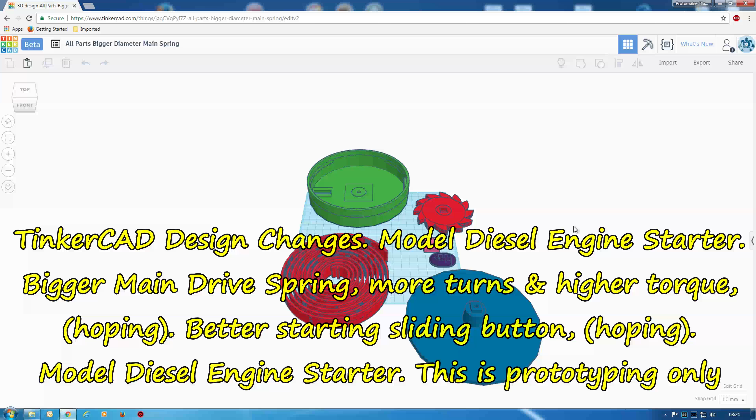Here I am in TinkerCAD. Let me move that out the way by clicking on there. And you'll see there's quite a few changes. One of the changes is to make this a bigger diameter. Actually, let me get this back. If I get that back, I can put the ruler on here. Sometimes having the ruler on is a bit of a nuisance because you have all these numbers popping all over.

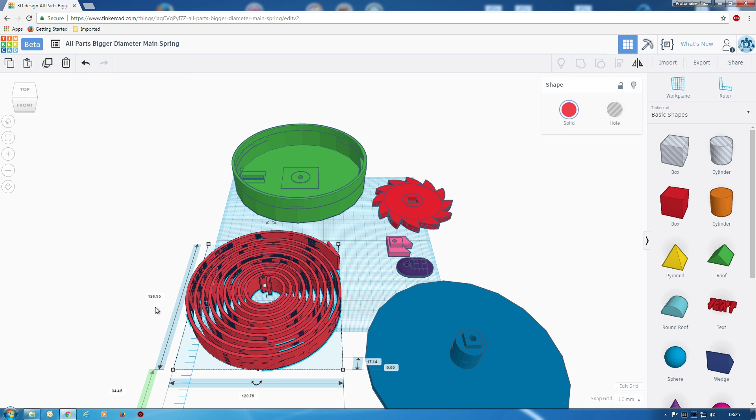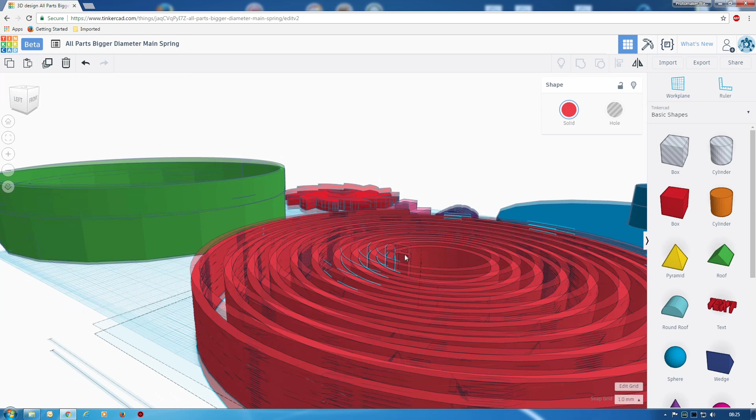But you can see that's, well, we call it 125. It is bigger one way than the other because it is a spiral. So I also made the height a bit higher, 17 millimeters. That's one of the changes. So by making the spring a bigger diameter, it was probably about half of this before, but by making it bigger diameter, I'm hoping for more turns.

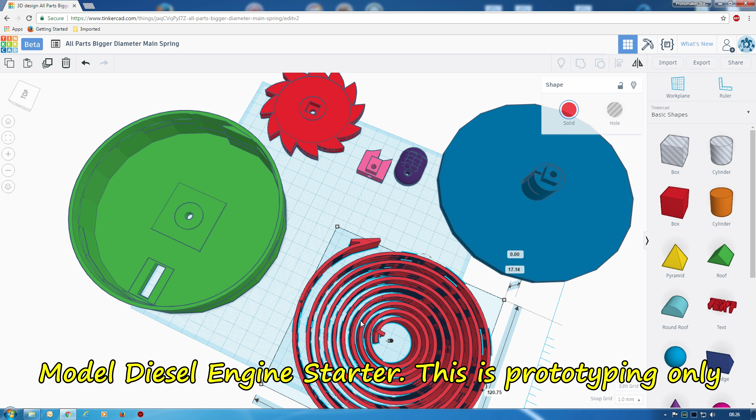Now I was thinking about making this thicker to get more torque, because there's not enough torque in it, like turning force. But I've made it a bit higher instead to try and achieve the same thing without making it too thick. One problem with making it thicker is as the spring tightens up, the gaps between the coils move closer together. So if you have a thicker material, it's going to restrict the movement, and that's going to restrict the turning. That's how I'm thinking about that.

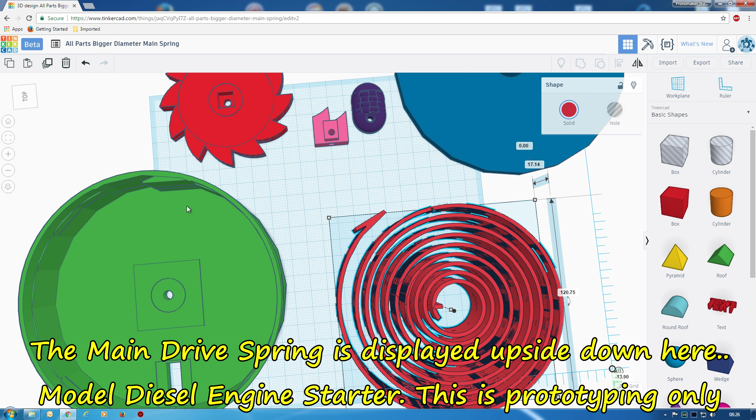Now I very much doubt whether this, even like this, will be enough power to get a model diesel engine started. I've increased the hook here. That's a hook that is upside down compared with this. This hooks on here as it's turning, because it was unhooking sometimes on the previous model. I've also changed the pawl here that hooks onto this ratchet wheel. So that ratchet wheel goes on here, then the spring goes on top of that, and then this is the actual turning lid that goes on top. That's upside down.

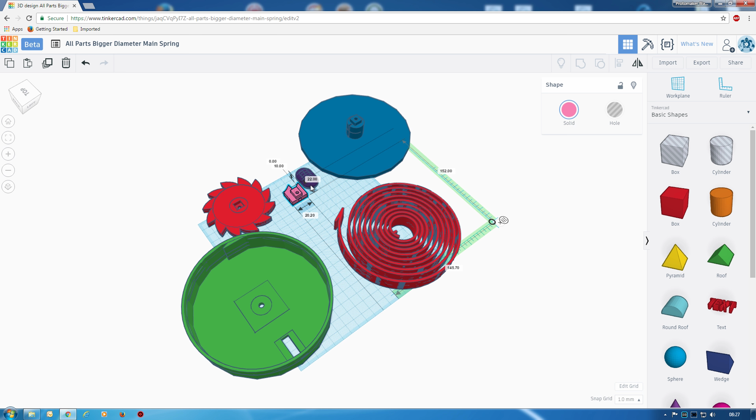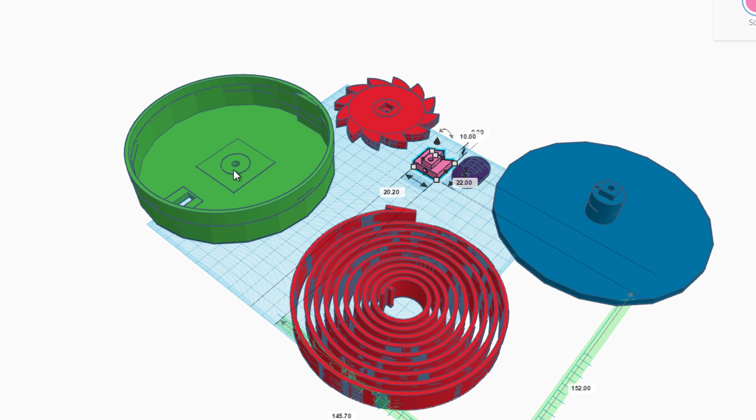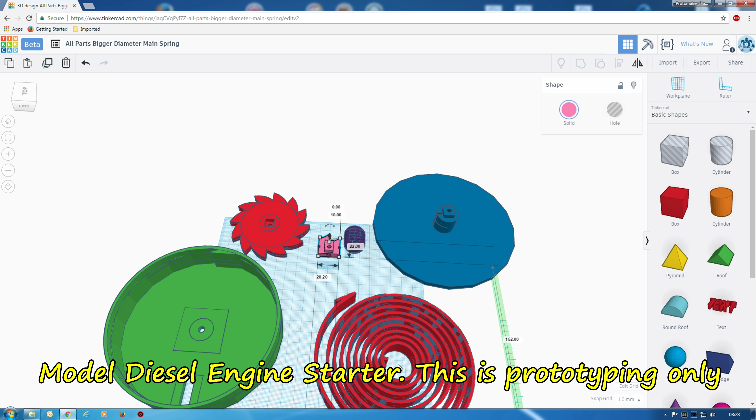Okay, with this that goes in here in the slot, and then there's a button that fastens on the other side so that that'll latch, and then we can slide that button over. On the previous model there was a great big thing stuck out the side. Doing it this way though reduces the height of the spring because this ratchet wheel has to be inside here. And the lid basically allows for the difference in the height, and obviously it's got that slot for this other side to hook into. I don't think there's much more I can really say about that.

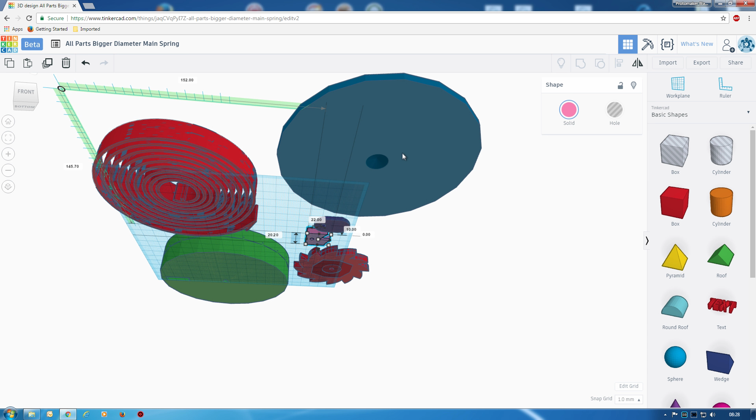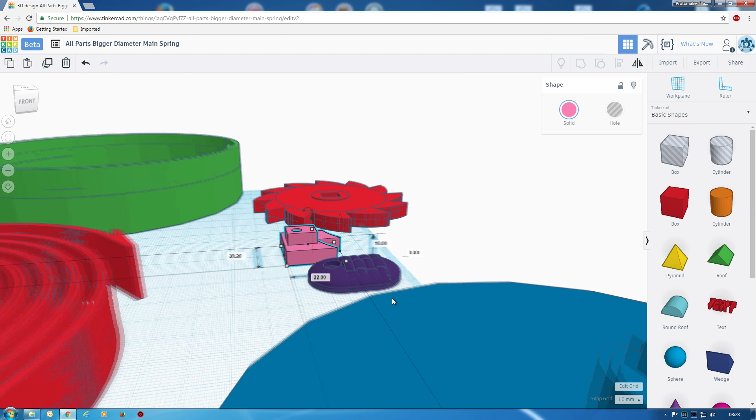So that square latch goes into here, so as this turns, this will turn, and the front of this plate basically goes under the propeller, the spinner on your model diesel engine. So the idea is to wind up the spring, it latches on the ratchet, you slide over the pawl, pushing this button here. Oh, I've added some bumps to the top of this button, by the way, to give more grip when you're sliding it about. Anyway, that unhooks the ratchet and it unwinds quite quickly. That is the basic idea there.

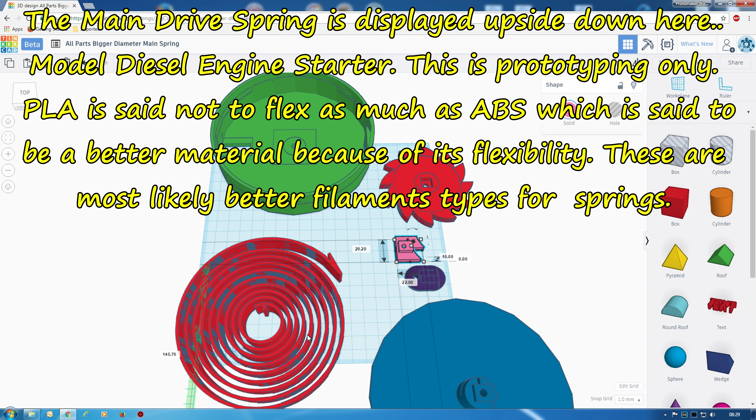This is all prototyping, so I'm intending to print out this big spring first to see how springy it is. Now you do get springing. I've tried this in PLA and ABS, and I don't know if there's any difference, to be honest, because I haven't had a chance to do any real testing, and I've done some changes that would be hard to compare. I intend to print this in ABS. That's what I have on the printer at the moment, and see just how springy it is, whether this can turn.

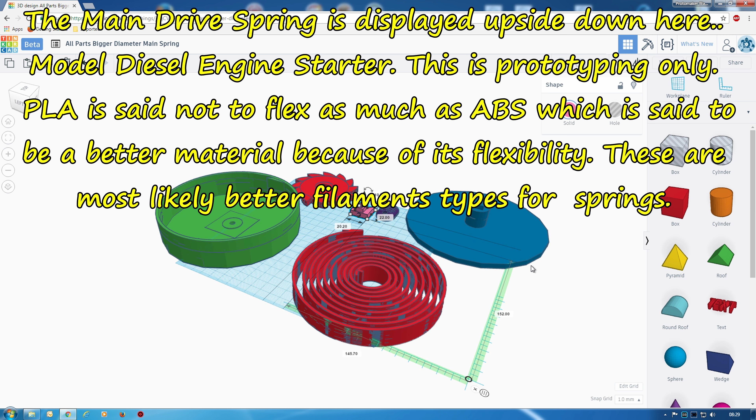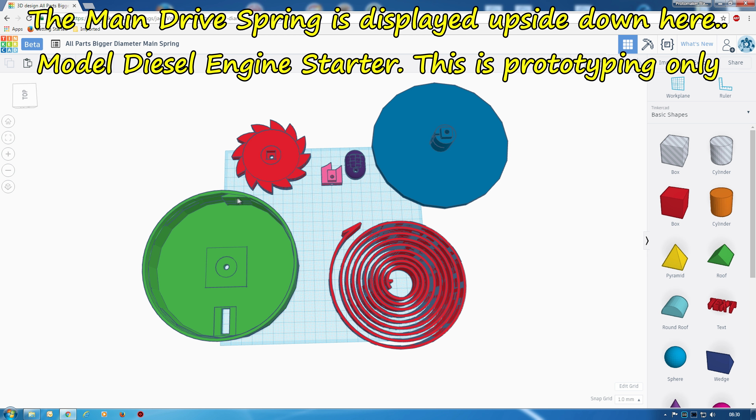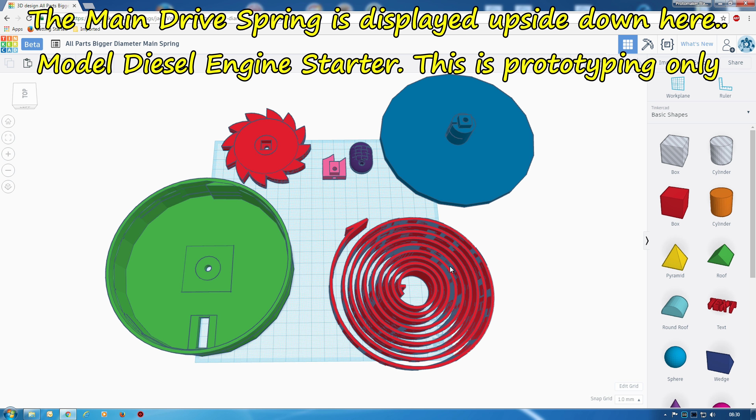I wanted it to unwind at least 1.5 turns, if not getting near 2 turns, so that after it's been wound up, it will unwind and give a model diesel engine 1.5 turns to get started. I think 1.5 is a good level. Having a bit more is probably advantageous. One reason for having a hook here is so that even if it does start while this plate is still pressed against the propeller, this can just unhook and turn round this direction. I should turn that up the other way actually, because that's upside down. It's just because I've been designing it.

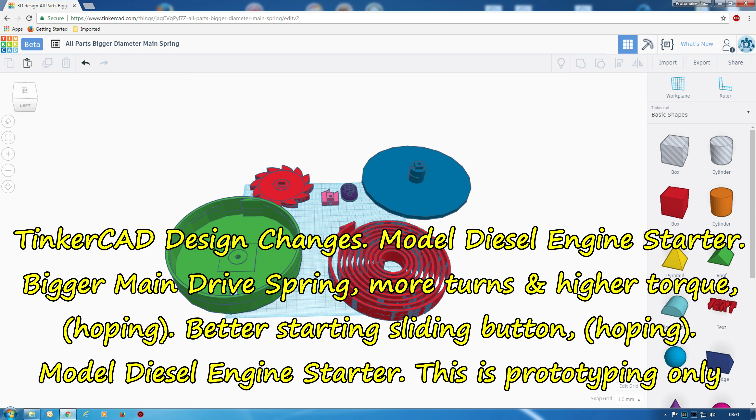Okay, so that's a bit about the design and update of this. So basically it's bigger, the spring is higher. One problem is it is a bit bigger. I wanted to try and get this to fit into a pocket or something actually. It's getting a bit too big to do that, but we'll see. All prototyping, just a basic idea.